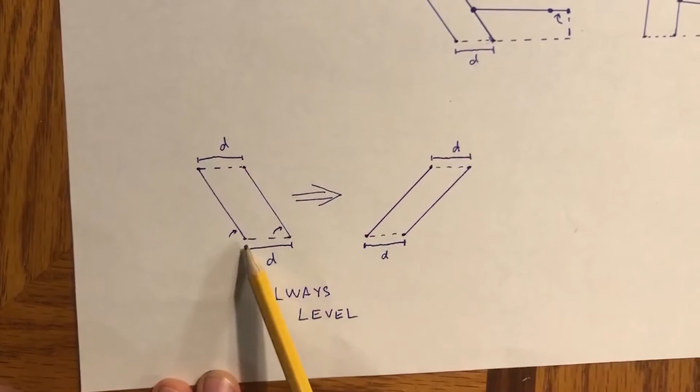It's the cabinet deck! What can we do to optimize this product? The two most important breakthroughs for this product came in the form of two 4-bar linkages. The first 4-bar linkage shown here was used to keep the hoist level. This was done by placing the two pivot points at the bottom the exact same distance apart as the two pivot points at the top.

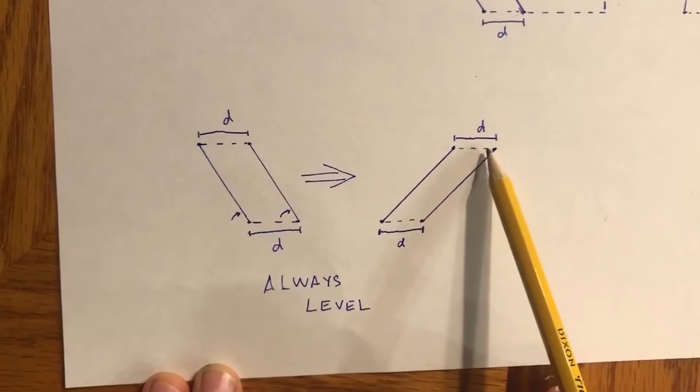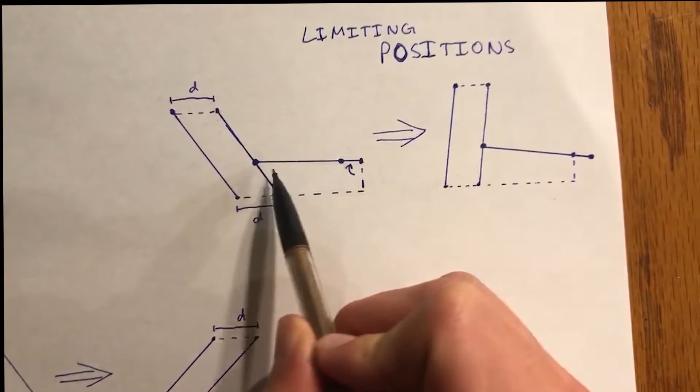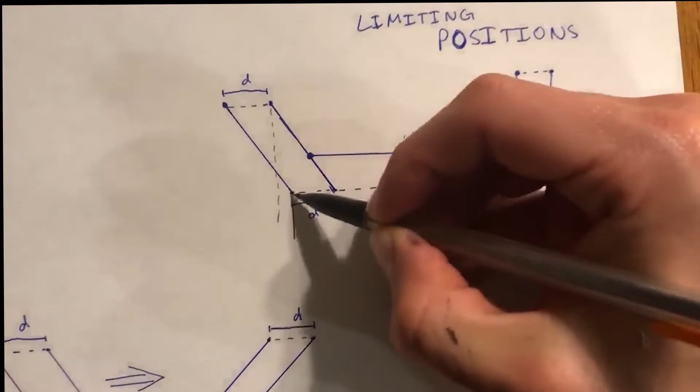This caused it, no matter how you rotated it, to remain level at the top. The second 4-bar linkage was used to obtain the two limiting positions of the device. Here you can see the limiting position when the 4-bar linkage is extended to its maximum distance. It is done so by rotating this rod about this pivot point. At this limiting position, you can see that the hoist completely clears the cabinet, represented by this space right here, and the weight from the hoist

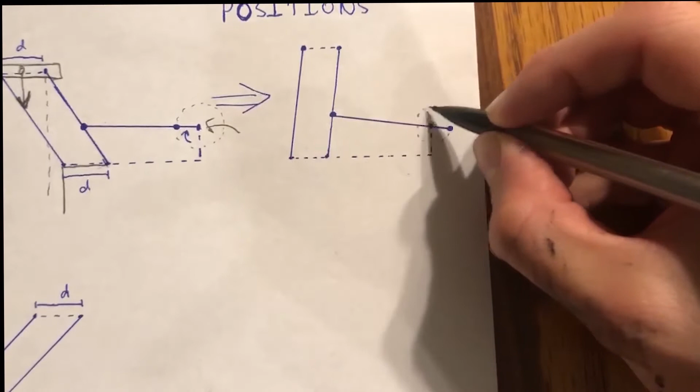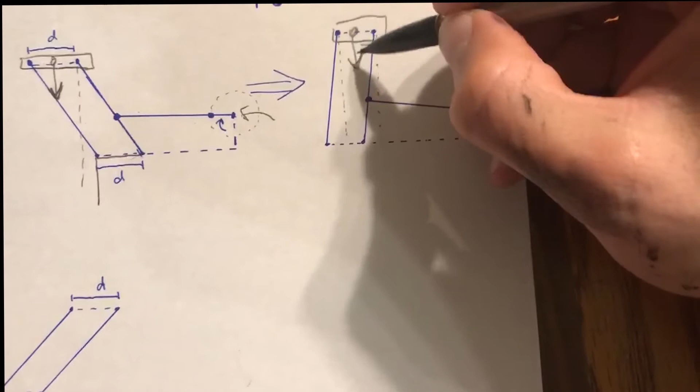will cause a force right here, which will keep the hoist in this limiting position until acted upon by an outside force. In the second limiting position, this is done by once again rotating this rod about this pivot point. Here, this rod is at the smallest distance that it can be from this pivot point. This brings the hoist back in over the top of the cabinet, safely into storage, and you can see the forces generated by the weight of the hoist will keep the hoist at this limiting position until acted on by an outside force.

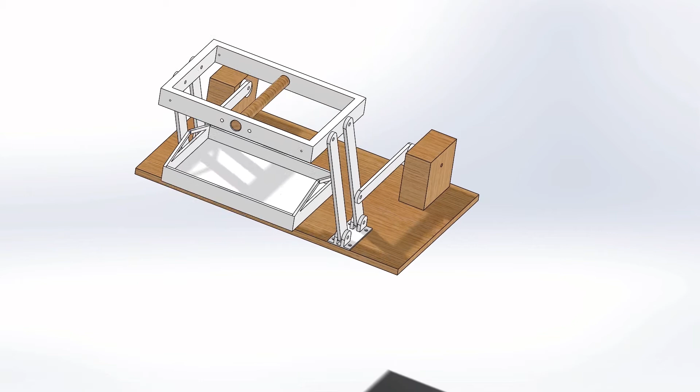MATLAB was used along with SolidWorks to determine the exact measurements of how long each link should be, allowing our device to rotate just far enough so that the tray would come over the edge, but not rotate too far so that the moment on the links would become too great and cause the device to fail. At one point we used a MATLAB 3-dimensional plot to determine the exact position and distance at which the link must be placed so that it would cause a full rotation without placing too much force on the mechanism and therefore causing failure.

Hey, yeah. You remember when we built that thing?

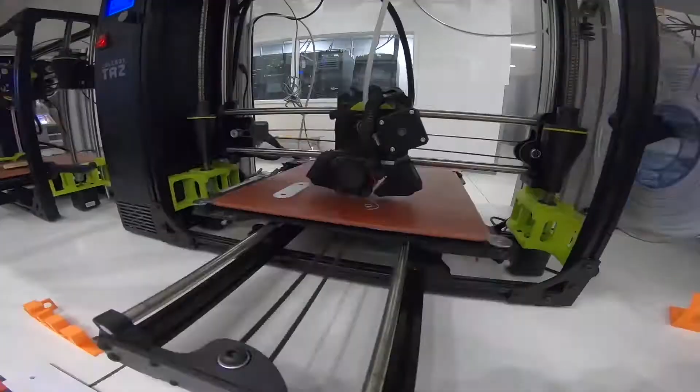Before we could start building, we 3D printed our 4-bar linkages using a TAZ 3D printer at Clemson Makerspace.

To manufacture the cabinet deck, you start by securing two 2x4 pieces of wood to your 21-inch by 12-inch wooden base. Make sure to correctly orient the blocks of wood according to the SolidWorks files. After securing the wood, drill the two 3D printed link holders into the base in their correct positions. With the link holders in place, you can now connect the 3D printed links to the bases. It requires a simple connection of a nut and a bolt, providing a smooth surface for the links to rotate on. As discussed earlier, since the base of the links and the tops of the links are evenly spread apart, the hoist will always stay level.

Now that the front links are in place, you can connect the back links to the 2x4. Start by drilling the screw into the wood at approximately 7.1 inches back from the front base and 2.8 inches high. Connect the two links in the back using another nut and bolt connection. Make sure to keep all of the connections flush with each other, or else the links will not rotate completely.

To make the hoist, you simply make a 7 by 11 inch box with L brackets in each corner for strength and stability, with a rotating rod through the middle of the hoist. Drill 2 holes in the rotating rod and run some thread through it. Building the hoist, connect it to the 4 links at the top using another nut and bolt connection. Once you're done with that, you can connect your rod and it should be fully functioning.

Yo, how do you think we can improve that?

Some possible design improvements of the cabinet deck would include motorizing it. So we left space back here to be able to attach motors to it. You could attach motors in 2 different spots, right here and right here, in order to automate this movement with the push of a button.

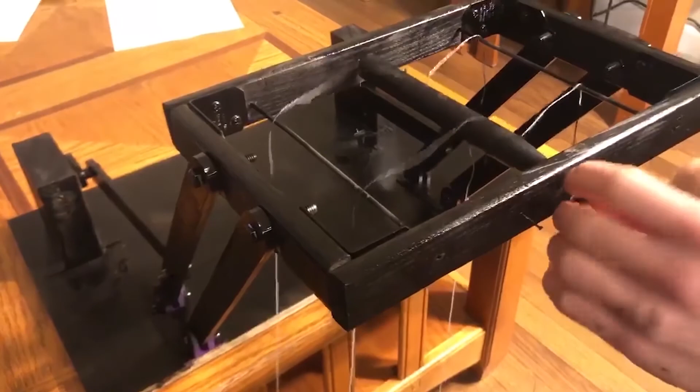In addition, pulleys could be added right here for these ropes to fit into. This would decrease the friction and make the machine more efficient.